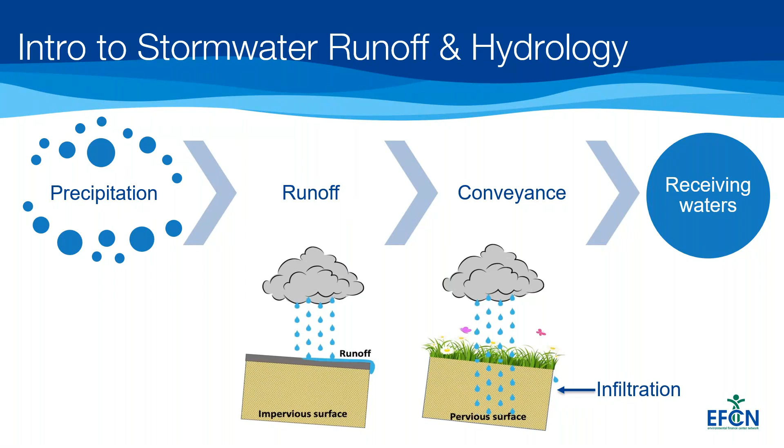We'll talk briefly about watersheds and stream networks. A watershed is an area of land that channels rainfall, snowmelt, and runoff into a specific common body of water, such as a river, lake, or ocean. And healthy watersheds provide services like water filtration and high property values. They can obviously increase that, and they also protect wildlife habitat, and they can create opportunities for recreational spaces.

In an urban setting, a stream network may be disturbed by development, and it can have consequences or impacts for the entire watershed as well. So it is really important to understand how the water moves after rainfall, and understand both the intensity of potential rainfall, we'll talk about that briefly with help of graphs, and the frequency at which these events, like precipitation events, are likely to occur.

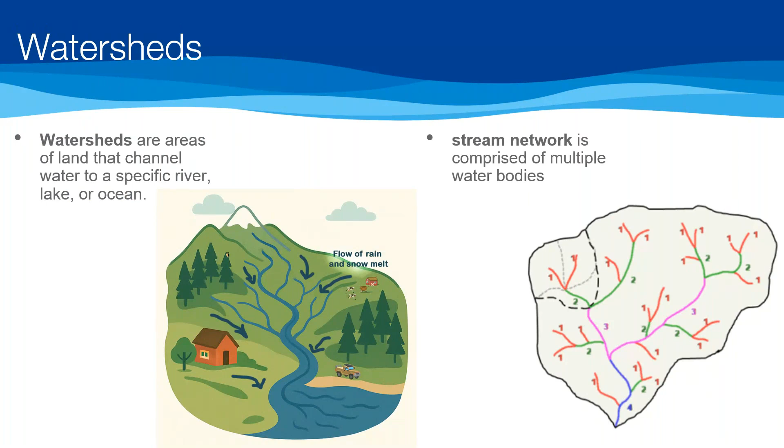So, as I mentioned, watersheds are interconnected systems. What happens upstream directly affects water quality and flooding downstream as well, and even small local actions like increased pavement in one subdivision can impact the larger watershed as well. So effective stormwater management is really critical at the watershed scale, not just focusing on individual parcels.

And these healthy watersheds provide us really essential services that we often take for granted. They help us reduce flood risk. They help with filtering pollutants, and they also provide wildlife habitat support and recreation activities. And when watersheds are degraded by excessive runoff because of lack of infiltration, we lose these services, and we must compensate through costly engineered solutions. So that is why protecting these watersheds is really, really important as an environmental and economic priority.

So in this stormwater management landscape, we hear the term runoff coefficient. It represents the fraction of rainfall that becomes runoff. Now we know how runoff is generated after rains, and it depends on the impervious cover, how much water soaks in or is infiltrated. There are different equations used to calculate amount of rain, and there is different type of data available from institutions like NOAA with curves and tables to show that.

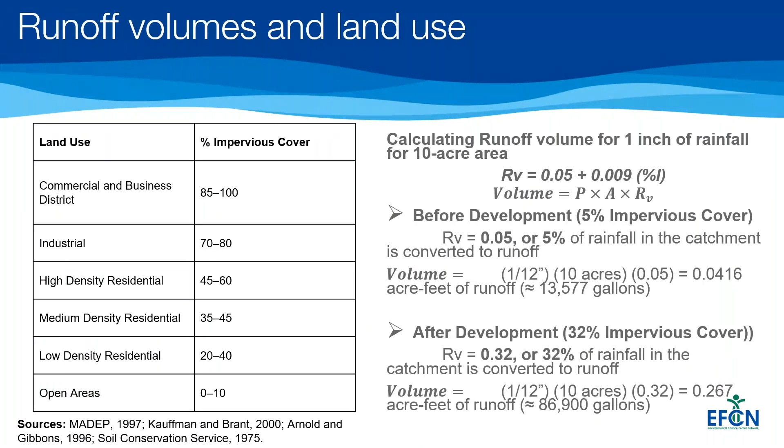Unlike the simple method, which focuses primarily on impervious percentages and is used for small sites, this method accounts for the interaction between rainfall, soil types, and land use to determine how much water gets soaked in or infiltrated versus how much runs off. It is usually useful for bigger sites, rural areas, or flood control, and it helps in sizing of ponds and stuff like that.

To determine a curve number, you'll have to look at the relationship between soil type, A, B, C, D, what the land use is in that particular area, which you can see in the table, and moisture. It is nonlinear because it accounts for the fact that dry soil behaves differently than saturated or soaked soil.

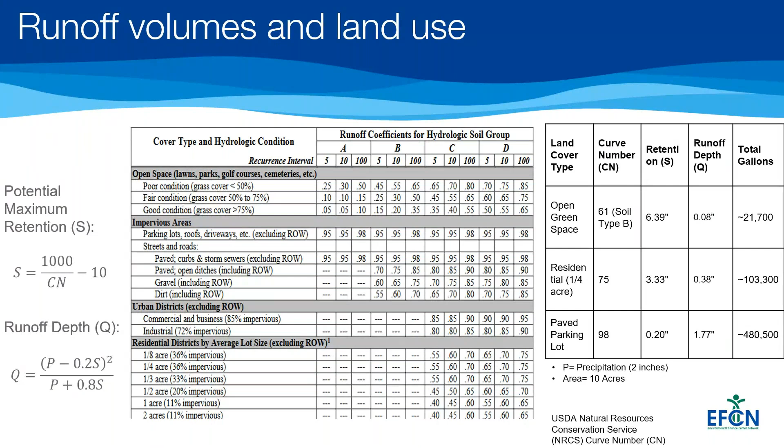Some basic terms that we often hear in this landscape: detention and retention. There's a subtle difference between them. Detention temporarily stores water and releases it slowly to reduce peak flow, and retention keeps water on site permanently through infiltration or harvesting. Detention helps us address flooding, but retention addresses both flooding and water quality because it helps infiltrate the water. Understanding this distinction helps communities select the appropriate design strategy for their stormwater infrastructure.

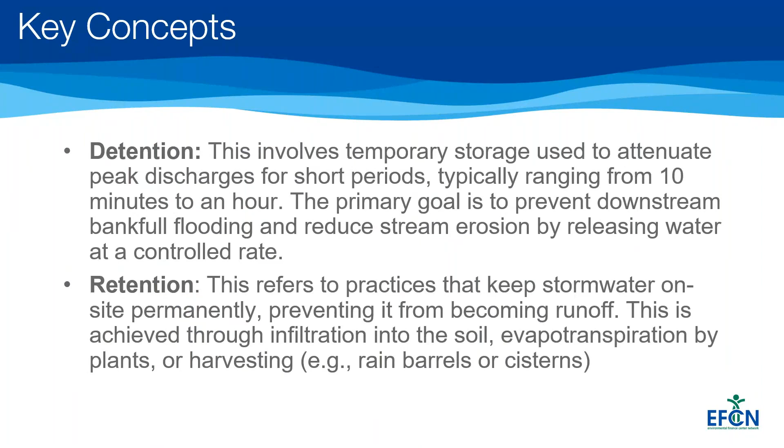Another key term that we use often is peak flow, which is the highest discharge during a storm event. High peak flow can cause stream bank erosion and infrastructure stress. Managing peak flow is really critical to prevent downstream flooding and erosion. We'll see an example momentarily. Engineers often use the rational method formula. Again, this comes with a lot of assumptions as well.

That the maximum rate of flow is produced by a constant rainfall, which is maintained for a time equal to the time of concentration. Flow attenuation, on the other hand, helps flatten the hydrograph, reducing that peak by slowing the water down. And stormwater practitioners can reduce the intensity of flow as it enters the stream.

Another key term, design storm, we often use in designing our infrastructure. We often hear terms like a 10-year storm or a 100-year storm, and a lot of people can get confused, or there can be a misconception. People think that a 100-year storm happens exactly once every 100 years, but in reality it refers to probability. A 100-year storm has a 1% chance of happening in any given year. Similarly, a 2-year storm has a 50% chance annually.

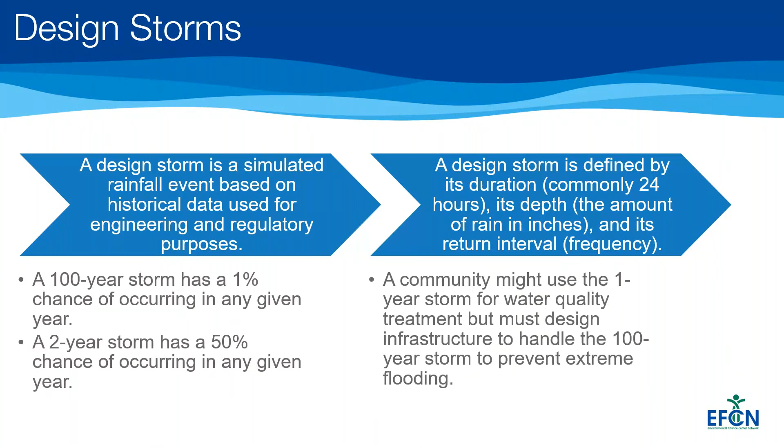So I was talking about IDF curves. We'll just briefly touch on that. IDF stands for intensity, duration, frequency, while there's another term used called depth, duration, frequency. Both describe how rainfall characteristics vary with storm duration and recurrence. IDF curves focus on rainfall intensity, how intense your storm is, typically expressed in inches per hour for various storm durations from 5-minute to 60-day storms, and different return intervals.

And that's why this creates a flash flooding situation. And that's why flash storms are more dangerous than normal rainfall events, because they generate intense runoff in a very short time frame. And our infrastructure sometimes is not able to handle that.

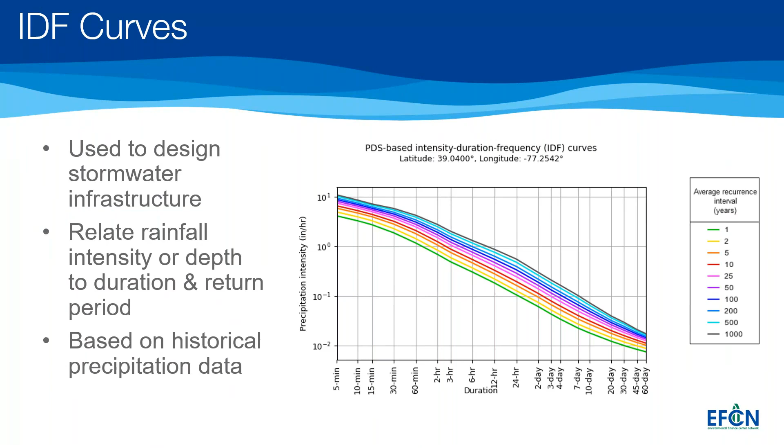Another key term or graph that is used by planners and designers is DDF. Depth, duration, frequency curves shift the focus from intensity to total rainfall depth. Previously, we were talking about flow. Now we are talking about volumes and depth. These curves are critical when designing storage systems, such as detention basins, retention ponds, and green infrastructure.

For example, a 100-year 24-hour storm might produce 7 or 8 inches of rain. The total depth determines how much volume your basin must be able to store temporarily, or must be able to infiltrate if it's green infrastructure, to reduce the runoff. And DDF curves are therefore really essential when evaluating flood storage capacity and watershed scale impacts.

Just in summary, you should be using IDF curves when calculating peak discharge, especially for storm sewers, culverts, pipes, inlet systems, things like that. And you should be using DDF curves when designing storage systems, detention basins, retention ponds, green infrastructure, where we consider total rainfall volume.

So again, just want to reiterate that this data is based on historical precipitation data and available for every zip code or every location in the US on the NOAA website.

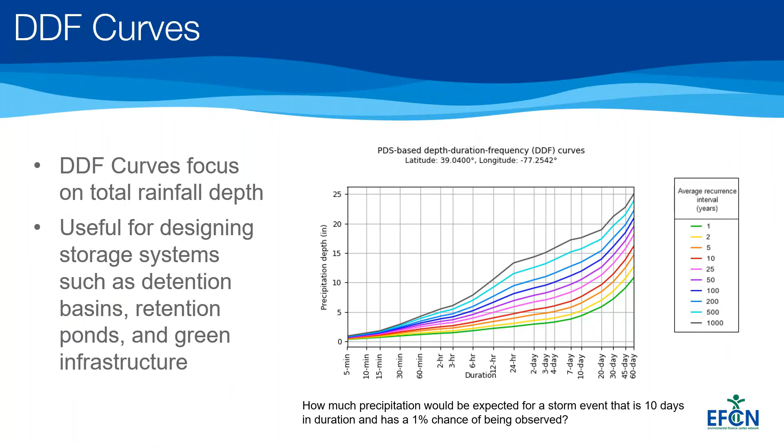So let's talk a little bit about climate change and stormwater impacts. Climate change is altering precipitation patterns across the US. We are not necessarily seeing more total rainfall everywhere, but we are seeing more intense rainfall events. Storms are becoming heavier, shorter, and more concentrated.

So that means infrastructure designed decades ago based on historical data may not be fully prepared and could be undersized for current conditions. Increased rainfall intensity leads to higher runoff velocity, which leads to greater erosion and higher inflow and infiltration into wastewater systems as well.

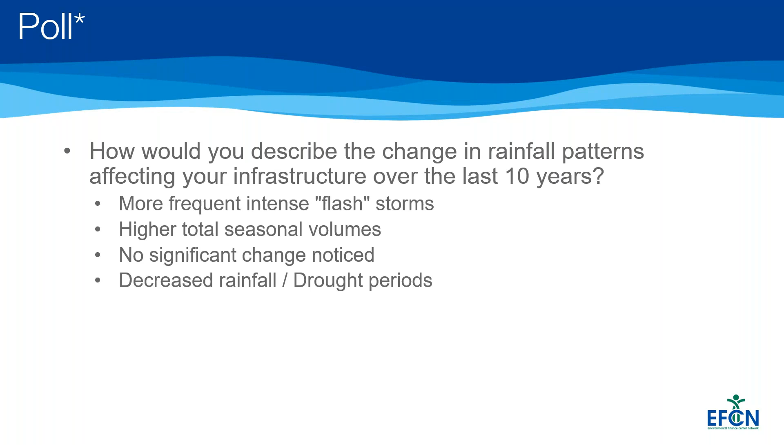All right, it looks like 67% of people said more frequent intense flash storms. 9% of people said higher total seasonal volumes. Another 9% of people said no significant change noticed, and 15% of people said decreased rainfall/drought periods. Yeah, that's what we have been observing with the data as well. There are more frequent and intense flash storms. We'll see momentarily in the next few slides as well.

Extreme precipitation happens when a location receives much more rain or snow during a short period of time than normal. What counts as extreme obviously depends on the location and season. For example, some location might frequently experience 2 inches of rainfall from a single storm. However, in other places, this amount of rain might be very rare, so it would be considered extreme in those locations.

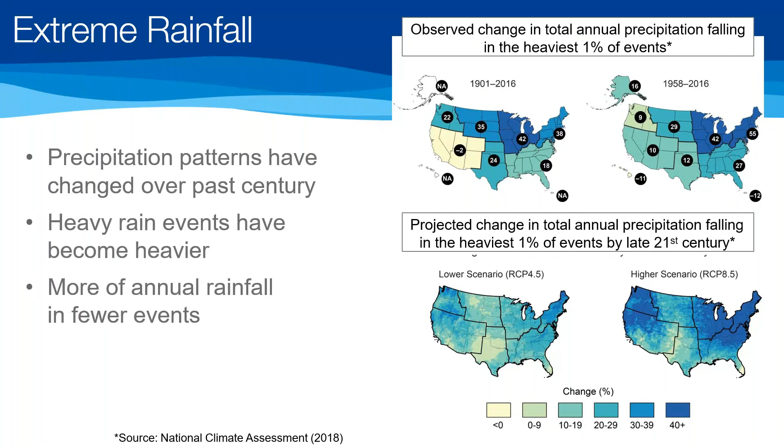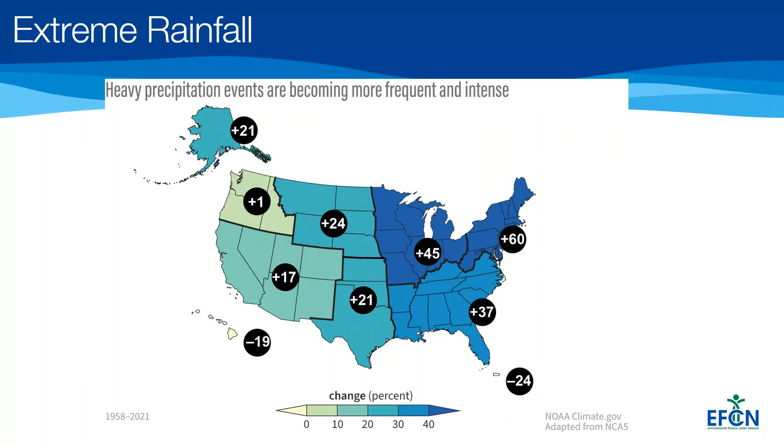So understanding stormwater control is really critical to reducing these overflows and infrastructure burdens. Extreme rainfall can also expose weaknesses in aging infrastructure, and for small systems, emergency repairs can be really financially devastating.

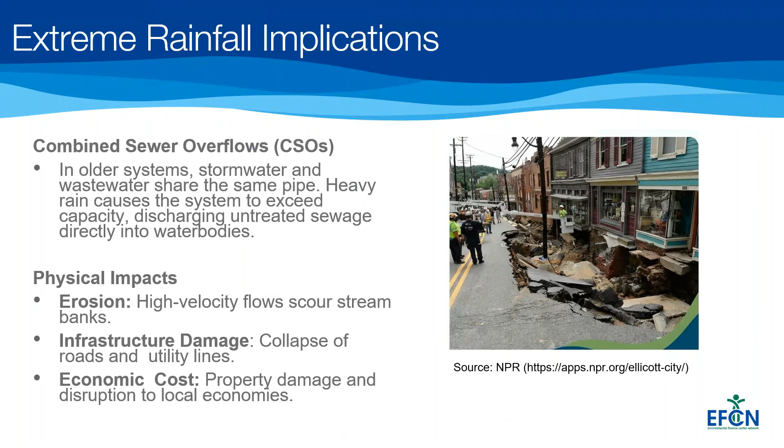Why this matters, I'll just skim through it. Stormwater directly affects influent quality in a lot of cases, flows and plant stability. High flow events can cause bypasses, overflows, and permit violations. And understanding how stormwater moves from one part of land to the other really helps protect plant performance and protect the watersheds which are receiving these waters.

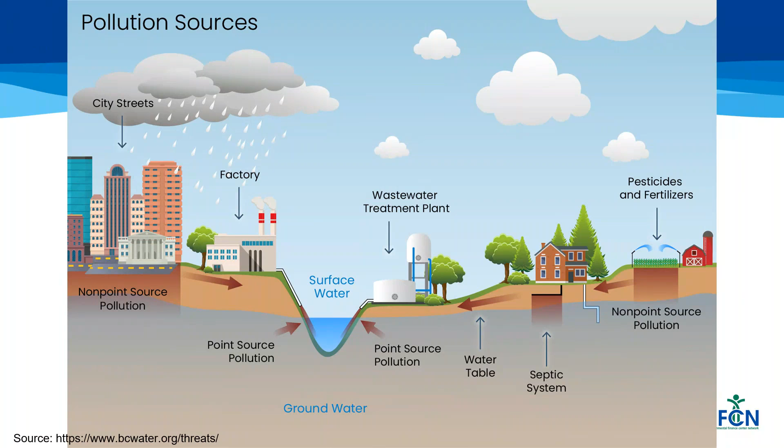Non-point source pollution comes from different areas across the watershed, like stormwater runoff, which can carry fertilizers from the land, pet waste from the sidewalks, or oil from streets and debris into the water bodies. Point sources are regulated by permits, whereas non-point source pollution is harder to track and often managed through land use practices and best management practices like vegetation buffers and green infrastructure. We'll talk more about that in detail.

So again, some pollution sources: nutrients, sediments, chemicals, and pathogens. Organic pollutants like pollen, leaves, plant clippings are very nutrient rich, and organic debris can clog these storm drains and leach nutrients into the surface water. Direct application of fertilizers, road salt, pesticides, pet waste, and nutrients added to lawns can easily be transported to local streams via runoff, and pollutants can originate from roads, rooftops, industrial sites, etc.

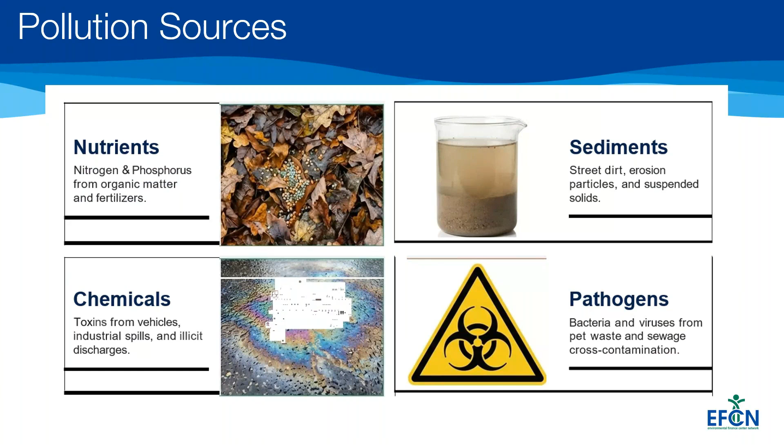I just wanted to plug in road salting, or salting your sidewalk, and how it impacts our waters, because we recently saw a major snowstorm, so everyone would have seen salt on the roads and streets. Road salt is a really significant stormwater pollutant. Chloride does not degrade easily. It accumulates in soils and water bodies, and elevated chloride levels can harm aquatic life and mobilize heavy metals.

We should be using smart salting techniques such as pre-treated brine application, and calibrate our equipment to reduce salt usage, because I was reading that 1 teaspoon of salt can pollute 5 to 6 buckets of water. So it is really important to optimize your salt use, especially during winter. Optimized road salting and proper winter maintenance can be considered a good housekeeping and pollution prevention best management practice under the MS4 permits, under good housekeeping for municipal operations. So that's one thing to keep in mind as well.

Back to how this all impacts. During dry periods, pollutants accumulate on surfaces. When the first rainfall occurs, that initial runoff, known as first flush, contains the highest concentration of pollutants. Runoff after precipitation acts as a vector, picking up hitchhikers like motor oil, lawn chemicals, and sediment into the conveyance systems. Excess nutrients can trigger algal blooms, which can cause fish kills, impair your waters, and reduce biodiversity, in both freshwater and estuarine waters. So capturing and treating this initial runoff can significantly improve water quality outcomes, and many stormwater best management practices are designed to address this phenomenon.

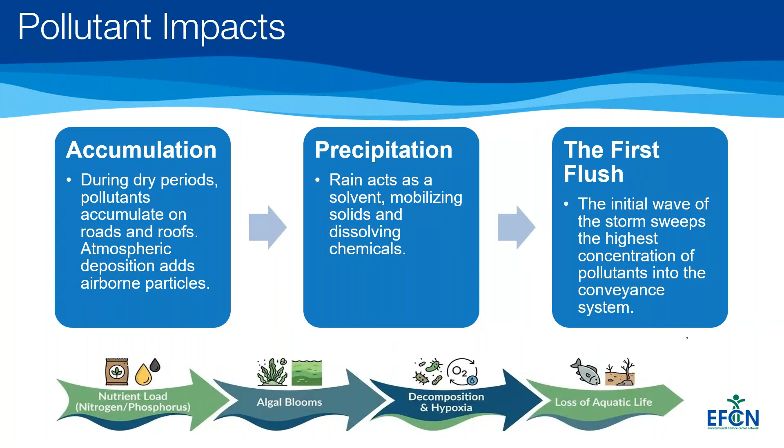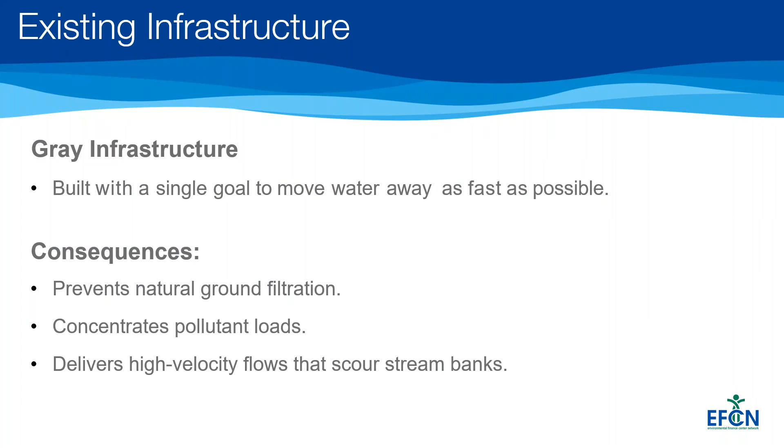So there are two different types of practices that we see: structural practices, which include detention and retention basins, swales and bioswales, rain gardens, permeable pavements, and constructed wetlands. And then there are non-structural practices which focus on behavior and maintenance. Examples include sweeping, erosion control, enforcement, construction site inspections, and things like that.

And the most effective programs combine both of these approaches. There cannot be an isolated single approach that can help you win this argument. So you have to combine multiple approaches to improve your water quality, reduce runoff, and things like that.

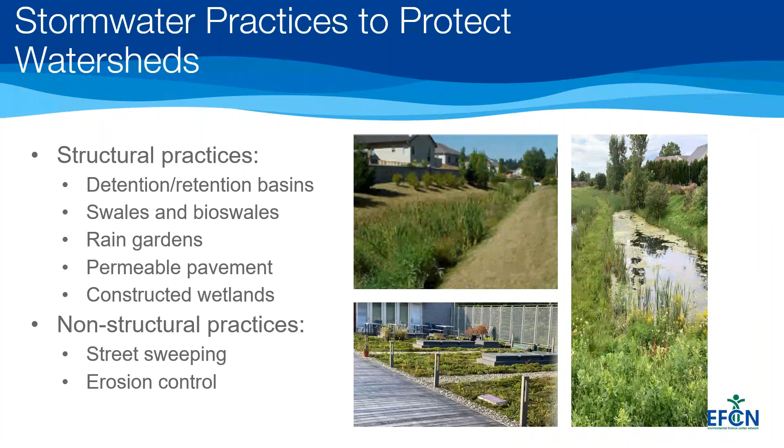And for many communities, green infrastructure will be a complement to gray infrastructure. We should not be thinking about this in isolation. It will be a complement to the gray infrastructure that already exists. So if systems do not blend both types of assets into a single management strategy, opportunities to use green infrastructure to save money, improve our environment, and increase efficiency could be lost.

And green infrastructure is particularly valuable for small communities because it can be distributed across different parcels, and it is really scalable as well. So for example, a single rain garden won't transform your whole watershed, but dozens across neighborhoods can collect stormwater, reduce your peak flow, and reduce your pollutant transport as well.

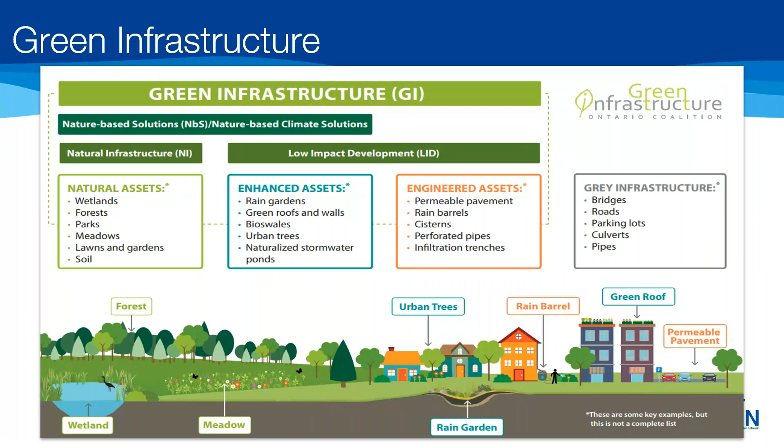Another poll. I think this will be the last one, but I can't promise. How familiar is your team with designing or maintaining green infrastructure, bioretention, permeable pavement, etc.? We'll give people a little bit more time to get their answers in.

All right, it looks like most folks have answered. 53% of people say they're just starting to learn. 32% say they have some projects in place, and 15% say they have a robust, established program. I think it's a really good response that we have people who are still in the learning phase, and I think this presentation would help you in getting some resources to do that.

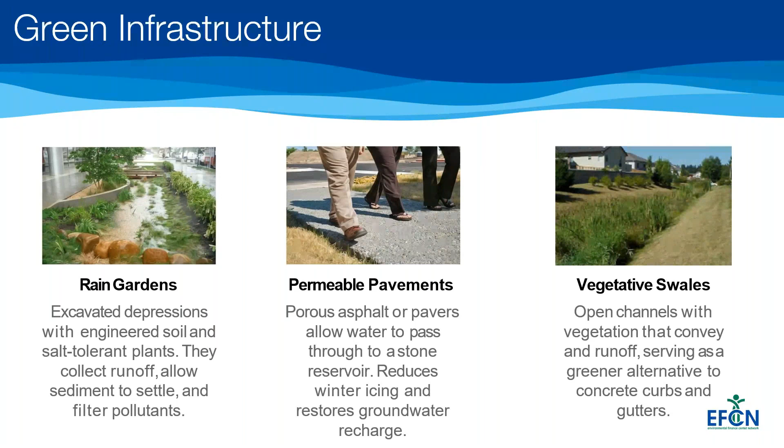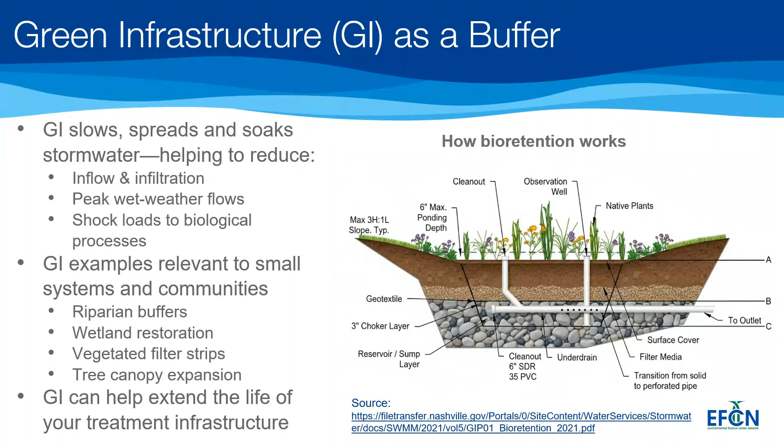And green infrastructure often acts as a buffer between developed areas and receiving water. So by slowing water and infiltrating runoff, green infrastructure can help reduce inflow and infiltration into sewer systems, decrease your peak wet weather flows, and reduce shock loads to biological treatment processes if it's a combined system. So for small systems and communities, this effect can extend the life of treatment infrastructure, lower peak mechanical stress on pumps and clarifiers, and reduce pollutant loads as well.

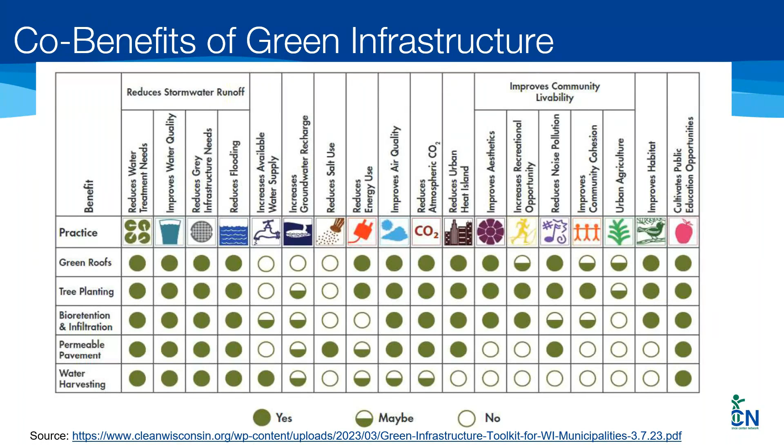These are some co-benefits of green infrastructure. I'll just briefly mention that you can use this graph or this image for competing for grants. Highlighting co-benefits can really make proposals significantly more competitive. So please highlight that when you are applying for any grant or any opportunity for funding, because these can really strengthen your funding application because of multi-dimensional impact.

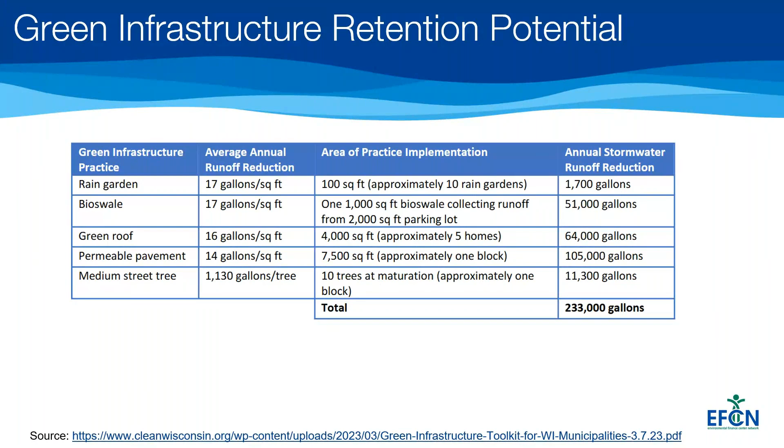This is the last one. Which green infrastructure practice do you believe has the highest potential for success in your specific community? Make sure to get your answer in.

All right, looks like most folks have voted. 41% say bioretention and rain gardens, 16% say permeable pavement, 20% say tree planting and canopy expansion, 8% say water harvesting in rain barrels or cisterns, and 15% say wetlands. Yeah, all these infrastructure are really great with a lot of co-benefits as well.

So I'll just quickly skim through MS4 permits and their overall requirements because we are running short on time. MS4 permits are designed to reduce urban runoff impacts on water bodies. They establish a framework for managing stormwater through public education, illicit discharge, post-construction management, and things like that. MS4 programs are proactive watershed protection programs. They recognize that urbanization, as we saw with different examples, increases runoff and pollutant loads, therefore requiring municipalities and some small communities to implement preventive strategies.

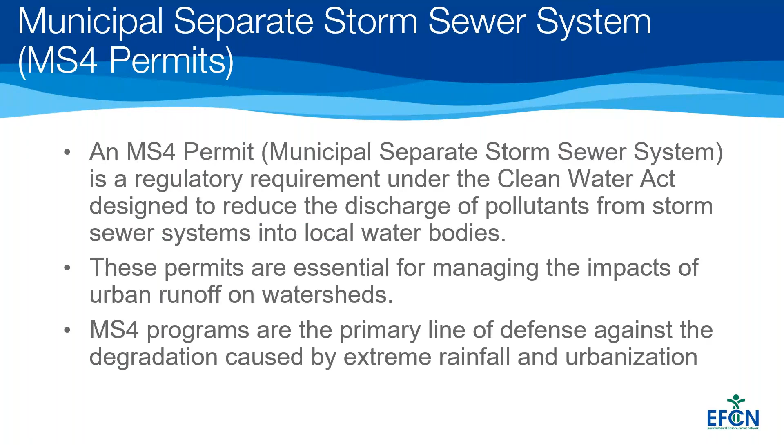There are different minimum control measures required under MS4 permits, which include public education and outreach, public involvement, illicit discharge detection, construction site runoff, post-construction stormwater management, and good housekeeping for municipal operations. These are usually required under all MS4 permits, whether phase 1 or phase 2. Most small municipalities or small communities come under phase 2 permits.

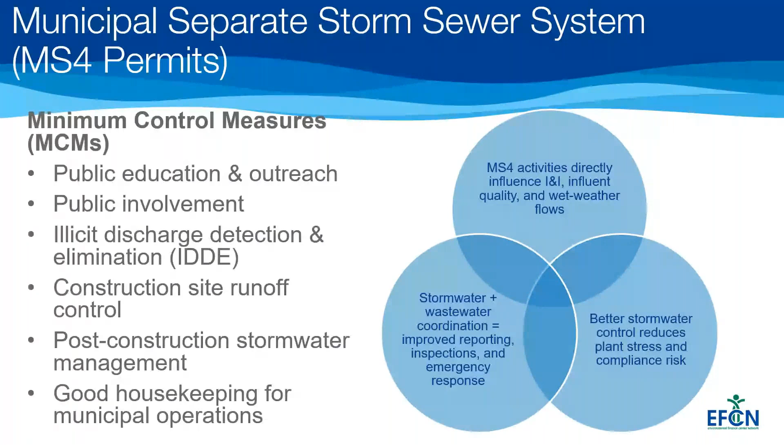So compliance for MS4 permits involves regular inspections, documentation, reporting and interdepartmental coordination, which is really crucial.

And operators or planners can play an important role in identifying unusual wet weather flow patterns, assisting with outfall inspections, and documenting the impacts of the storm, and early detection of these cross connections or illicit discharges or inflow infiltration can help prevent regulatory violations as well.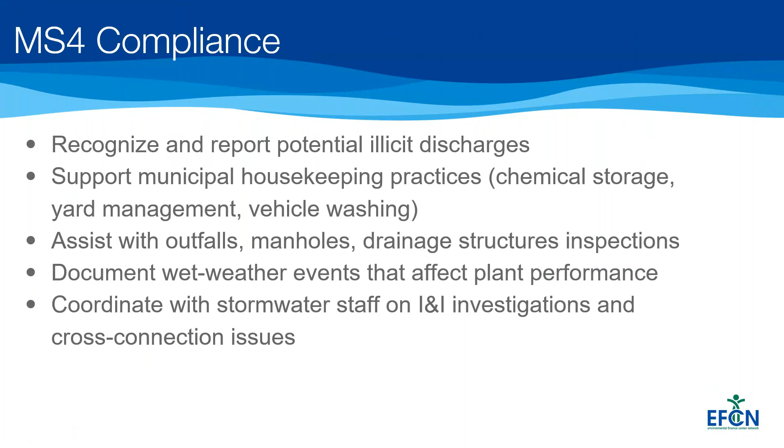So I just wanted to highlight two of these minimum control measures because I feel they usually get less attention than others. So public behavior obviously significantly influences stormwater quality, like improper disposal of chemicals, pet waste, and trash directly affects runoff quality. So engaging the public and communities reduces contamination at source or holds it at source.

And some of the effective strategies to do that would be community cleanups, school partnerships, open houses, and social media campaigns. All of that can contribute to build awareness here in Maryland and Prince George's County. We also run at University of Maryland Environmental Finance Center, we also run a program on

basically doing that, providing education and outreach to communities. The name of the program is Climate Steward Academy, where participants come and do a stormwater project as well in the end while learning about the program and stormwater management impacts and things like that.

So again, another MCM is on stormwater education and outreach. You can have key messages like "only rain down the drain" that are, I feel, simple but really powerful. Your outreach materials, if you're a municipality, should be clear and actionable. It could be translated into a different language as well if there is need for that.

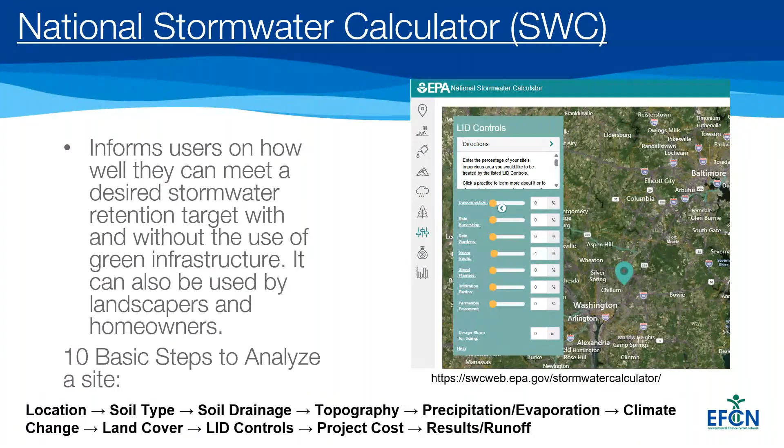Obviously, that won't be that accurate, but it will give you at least an idea of how much that particular strategy you are trying to implement could cost. And it can also help when you're applying for any grant application. It can strengthen your proposal for that. Again, this is a scenario from that.

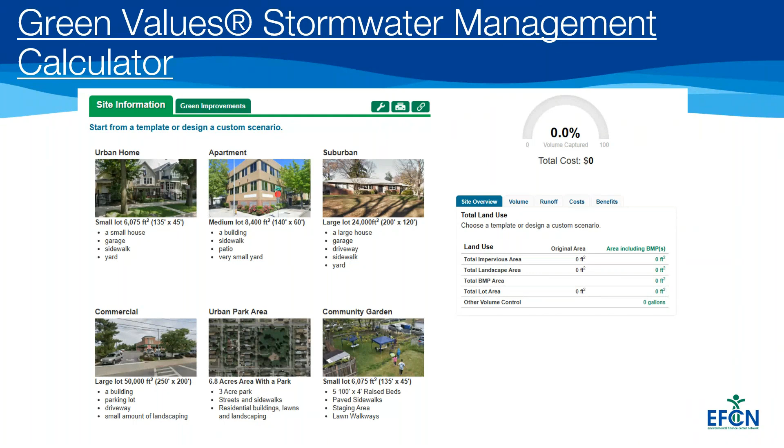It shows other hydrology and runoff metrics as well, with and without best management practices. It can also estimate increases in real estate values and things like that. So it is really a useful tool if you are doing any initial planning, or planning for a small scale project as well.

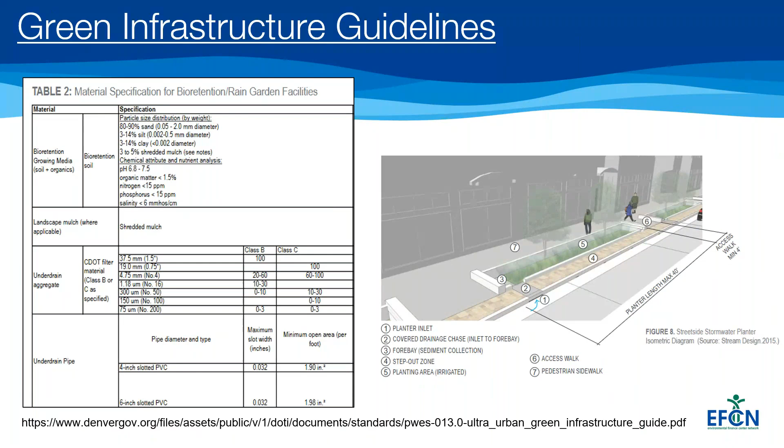These are technical design guidelines such as Denver's Green Infrastructure Guide. So if you're looking to go more in depth on how to design green infrastructure systems, you can go to this website and download this. It is pretty detailed and shows really good visuals on where to install it, the sizing and things like that. So it's really useful if you're planning any green infrastructure improvement project. I think that's all from my side.